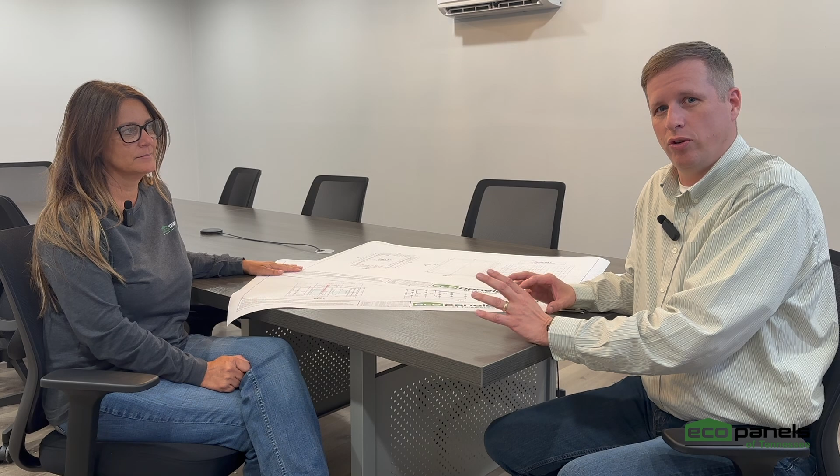We wanted to do a quick little sit down and go over our plan approval process. Okay, and yeah, it's a little technical and such. This is a little inside baseball, but we want you all to have a better understanding, not just of our product. A lot of our videos are about our product, but the process is a big part of it too, right, KP?

And so when we're doing plans and KP draws these out for us, there's a lot of information that she has to have. You've got to have stuff from the customer. Kind of hit on some of the main points real quick. Okay. So basically, first thing I look for when a plan comes to me is to make sure it has the outer dimensions, the wall height, the roof pitch, and any kind of details that will help me towards the end, like if your roofing system needs any kind of pocket,

and if you do have your electrical already, that just makes you one step further. And doors and windows. Openings. Yes, doors and windows. It normally doesn't come with the plans, but the person that you're talking with will send me the rough openings. And it's best just to get that from the manufacturer that you're buying the windows from. So the window and door rough openings is a very important step.

Yep. So you, your salesperson, KP, maybe your builder, subcontractors, all these folks are working together to try to get information from your side over to our side so we can get them on our plans, right? And at some point, all that comes together and KP gets it all on here. But before we make your panels, we really need to make sure everything's correct. And oftentimes it takes more than one set of eyes to do that.

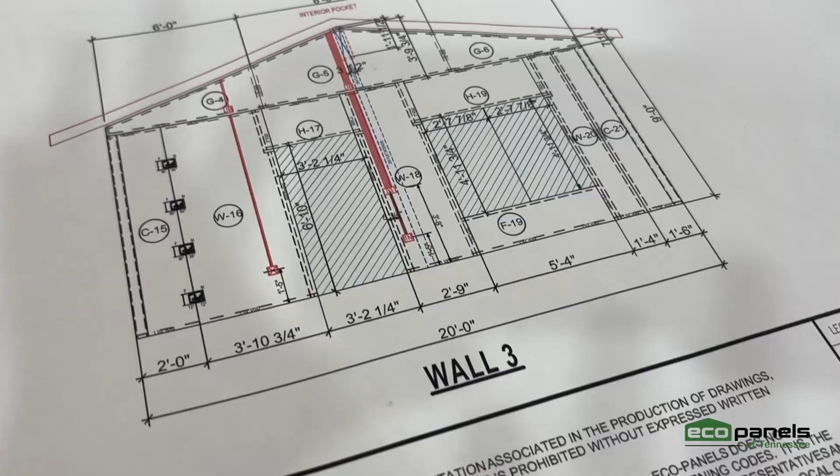And we're working with different codes throughout the country. That's not something that we necessarily research ourselves. So we need the customer, the contractor, to say, "I need an outlet every 6 feet along this wall, or every 8 feet, whatever that code is in the area." And what we use is center of the box. A lot of people use top of the box, but I prefer the center because our guys will build that accordingly. It just goes smoother.

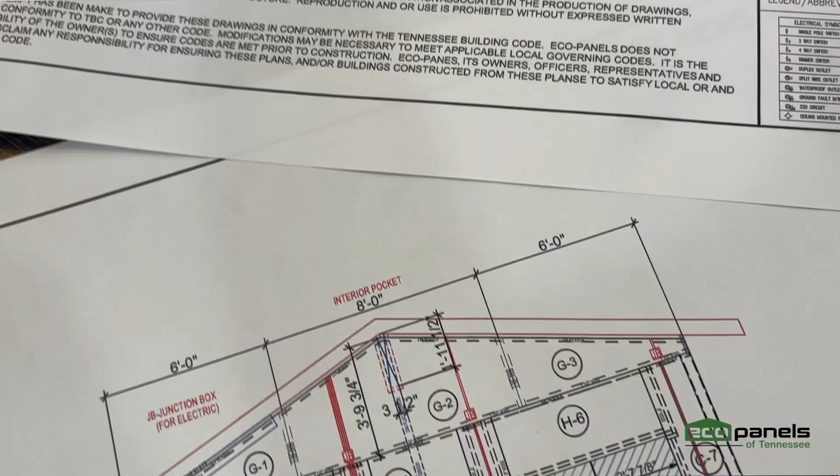And probably the last thing is, we have conduit built into the SIP panels that creates a raceway for the electrical wires, depending on if you're on a slab or a crawl space. We need to make sure those lines are running up or down correctly, or both. So make sure your electrical is all laid out for your exterior walls only. We're not concerning ourselves with interior walls here.

Next section, maybe gable ends. Let's talk about a gable end a little bit.

So when it pertains to the gable end walls, what I need most is your roofing system, your roofing construction. Even if we're not doing the roof panels, if you have gable ends that you want to be SIPs, I will need your roof construction. And that could be, for example, your truss drawings, which are great to go by. That way I don't have any miscommunication.

Yep. And with that, what I ask a lot of times is the heel height. And people maybe don't understand what I mean by that. And basically that's the height on the side where it covers your roof structure. Covers that point from the top of the wall to the bottom of the roof, basically, right? Yes, perfect. And so if I have that truss drawing, or if you use conventional framing, that's fine too. I just need to know if you're going to go with a 2x10, 2x12, and then I'll know what that heel height is. Yep, perfect.

Then we often work in pockets into walls for maybe exposed beams or LVL supports, different things. So go through that maybe just a little bit. Yeah, well, that's the same thing. Usually the ridge beam is going to be in the gable ends. So I would like to know what size that beam is. And some people want it exactly the size, and some people will give a little bit of extra room, an 1/8, a 1/4 inch, so that they have a little extra room to get in. And they can always foam around that afterwards and trim it out, and it covers up, but it makes sure that their beam fits in their pocket, right?

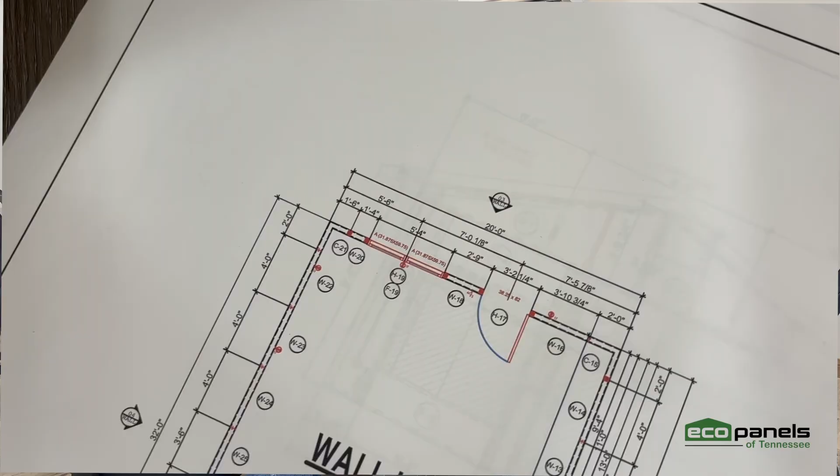Yeah. And of course, those pockets can also be in the length side of your house, because if you don't want it to sit on our walls, but to keep that height, we'll also put them in the side walls and do some pockets in that as well. Yep, very good. Then maybe we talk about roof panels a little bit.

Obviously just checking general dimensions and things are good here, but if you've watched our videos, you know our roof panels are a little bit different than a lot of other SIPs because we're a poly injected panel. We don't make as big of a roof panel as a lot of the EPS manufacturers do, right? So we're looking at 10 to 12 foot max as a length, 4 foot wide, and our roof panels need support. So we're looking for typically 3 points of support per panel. And when we say support, we're talking rafters, trusses, things like that, right?

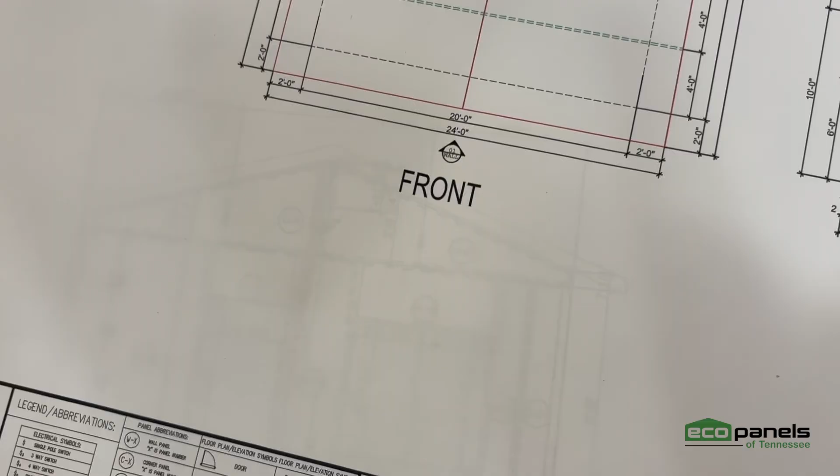So it's important to make sure that they have the rafter spacing correct on the drawings, because KP, you often put in reference lines of where their rafters or their trusses are, right? Because when I'm doing the panel design, I'll need to know where to stop and start that cutoff line, where the panel sits, so that it will get a good seat where they can screw down to that rafter, to the truss. So just make sure that we have the correct spacing notated, that the trusses or rafters start location is correct, and that the spacing on center is correct.

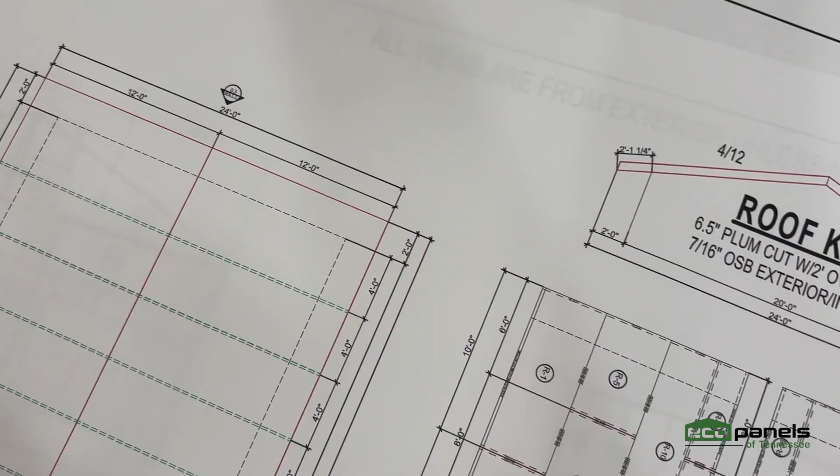I'm glad you mentioned that, because that start and stop can make a difference. Let's just say I start it from one end, but you prefer it the other direction. Right. Just make sure that you have that for me. And also the pitch. Yep. So verify pitch, verify rafter spacing, overall size, because that's going to really determine the way you lay out the roof panels and how they go together. Yep. And so that's very important.

Then outside of that, really just give a good general overview of your dimensions overall, right? Make sure those dimensions are correct. You've probably been communicating with your salesperson and KP all the way up through this, and details change and they go back and forth through the process. But ultimately, at the end, you need to have a stop, a pause, if you will. When you're getting ready to sign your plan approval, it's a good time to have that pause and try to forget everything almost and look at this new and make sure everything is good and in place the way you want it. Thank you, KP. You're welcome.